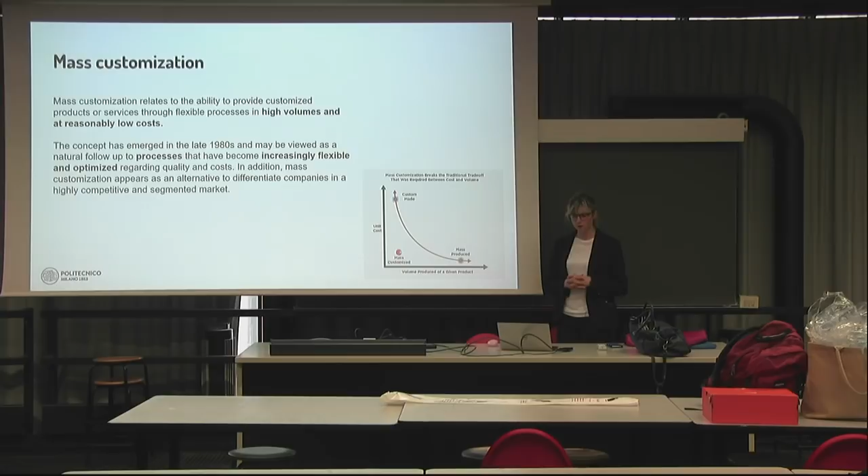So the topic is innovative mass customization for building technologies. And the idea is that mass customization relates to the ability to provide high volumes at a reasonable cost. So mainly the idea is to differ from the mass production that is typical of AEC, so architecture, engineering, and construction, and deal more with customization of different products.

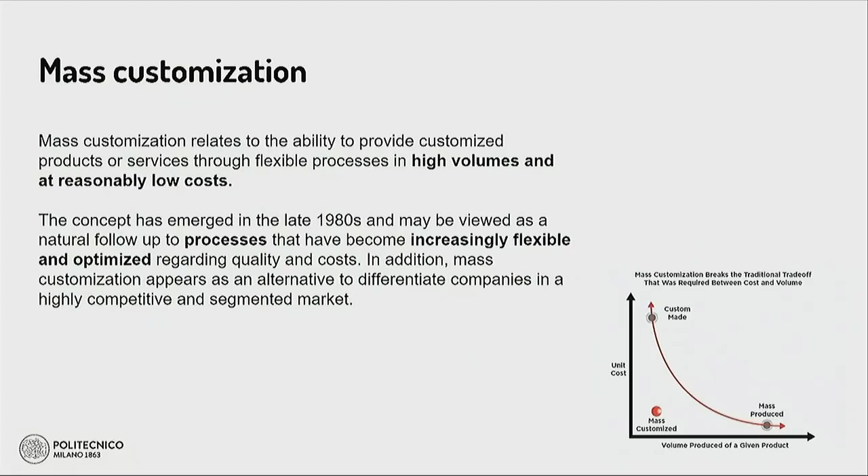This happens in different sectors, mainly more innovative than construction, like, for example, automotive or digital innovation, where things go very fast and are customized for the user because innovation is very near to the user. In construction, this is less known, and it's mainly a customization that goes through some products and some tools, so it's a little bit less focused than in other sectors, but it's starting to be very important because the tools allow it and the innovative types of machines allow it.

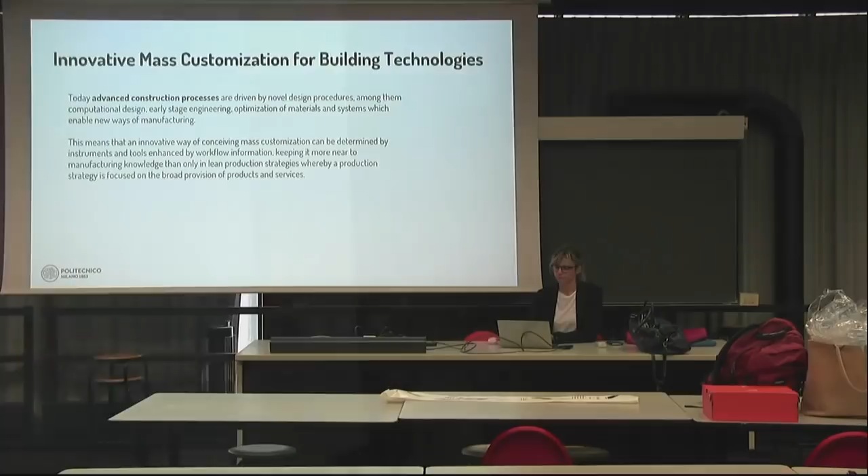So these advanced construction processes that allow mass customization are mainly driven by two enabling factors. The first one is advanced manufacturing technologies. This is a very big boost in how architectural components and building systems can be made, mainly due to advancements in digital and cyber systems, and different types of digital fabrication that allow a direct connection between the architect and the construction machine.

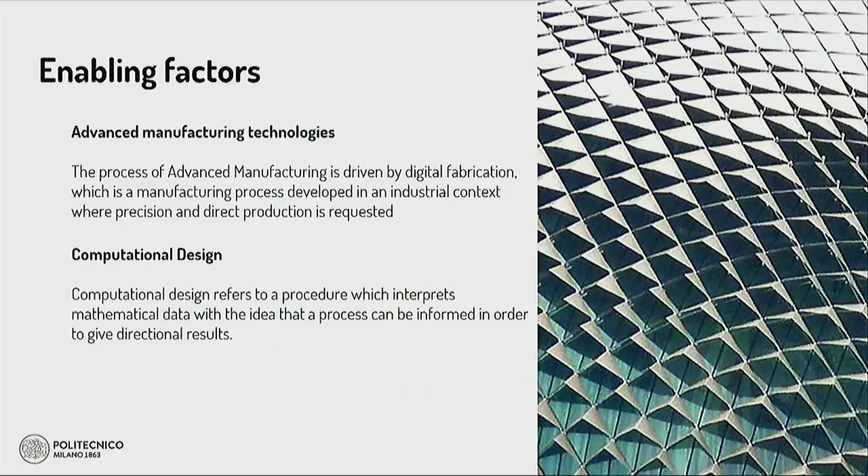Then the second enabling factor, quite important, is computational design. Computational design is a way to make parameters. They make you understand which type of design you're doing. So making numbers that you can work with and understand which type of shape, geometry, or performance you're getting.

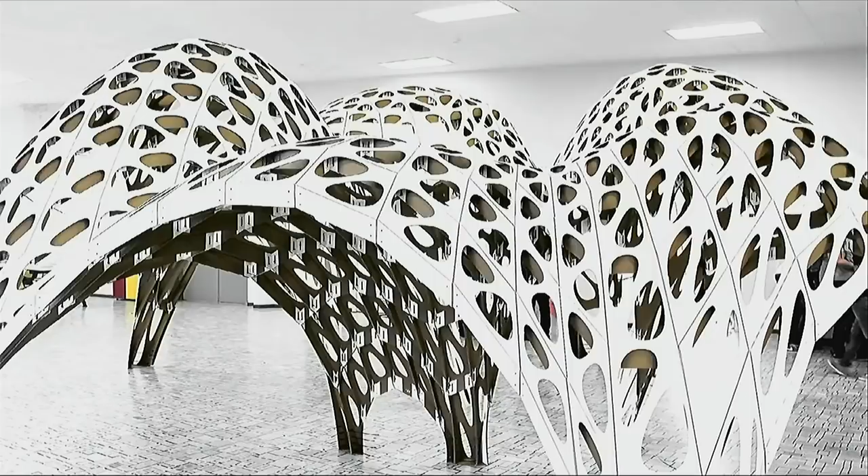So some of the projects I will tell you about are mainly made here. This one was made with the students in 2013. It was part of a workshop. And it's a form-finding pavilion that used computational tools to develop an innovative shape and then to directly digitally fabricate it here at Politecnico. This is the result. It was here nearby in one of our spaces in Politecnico. The idea is to engage the community in what we do here and to work with the students in our spaces.

And this was the form-finding process. So the idea is to customize the design with a specific shape. That is the first one on the top. So the idea to have this hanging curved shape, a form-finding that is mainly dealing with the space because the different entrances are related to the different classrooms. So where you can enter, you have these different spaces. Then we tried to understand the performance, so how it was working, with the meshing process of understanding the different efforts on the surface.

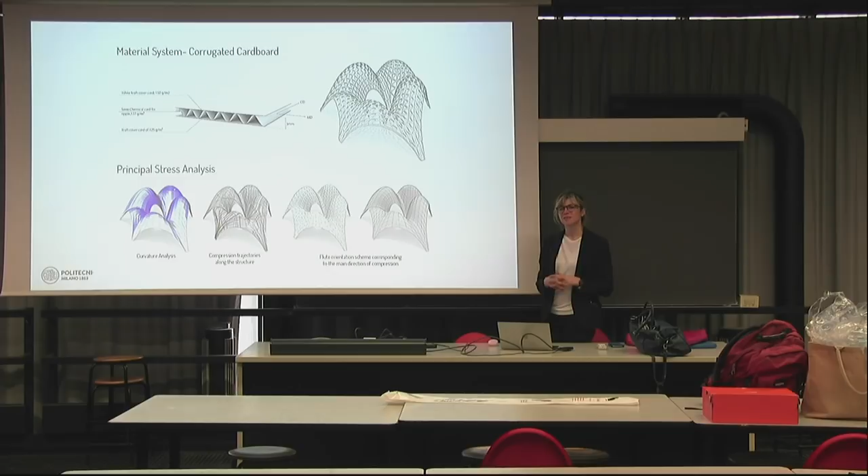Then a material analysis. So I think what's important today in the way we can customize our design is that we can embed properties of the materials directly in the design. With the material analysis, we used cardboard, which is a very traditional material. Mainly it's the one you use for takeaway pizzas. So it's very rigid in one direction and very soft in the other direction because it has a one-directional geometrical load-bearing structure.

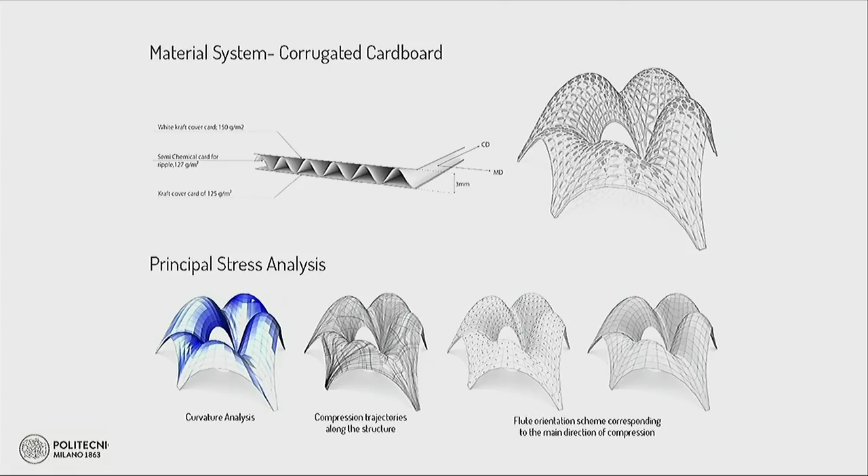So we tried to optimize the principal stress analysis together with the students, understanding where the main efforts are going. And then we started with a tessellation process to make the different components, understanding which are the main directions, and so to make an optimization that allows flat panels. Flat panels are usually much less expensive than curved panels. In construction in general, we have a ratio of cost increase in relation to curvature that is 1, 10, 100. So flat is 1, curved is 10, double curved is 100. So it's much more expensive to have special components than flat components.

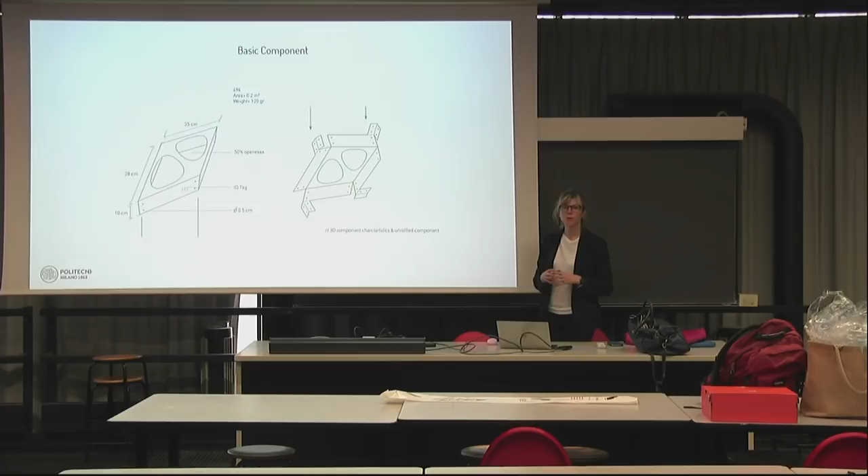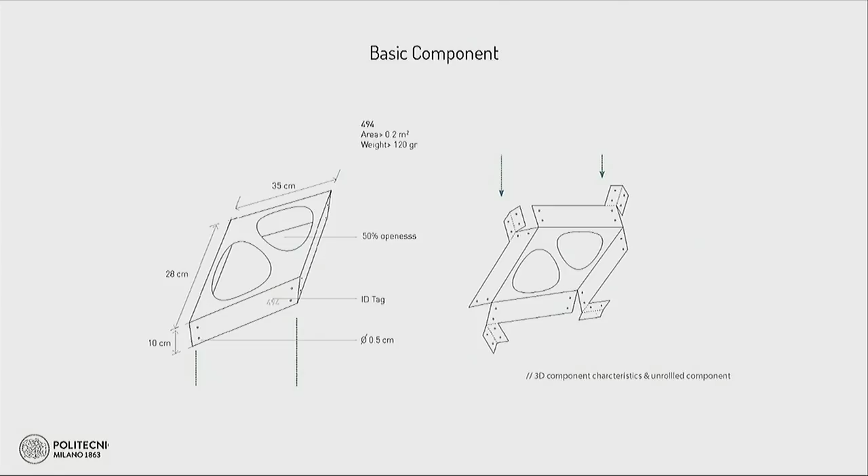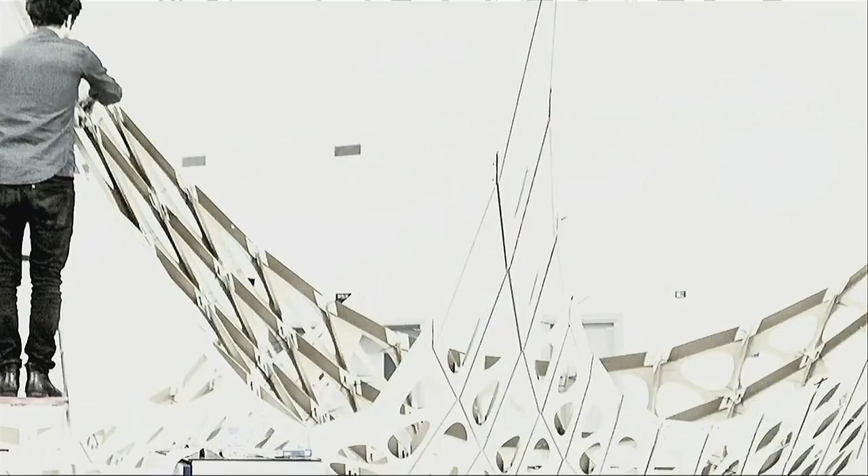This was the final effect, trying to understand how it could work. And then we assembled it in components, like in mega components, because of course the structure is resistant just in its final shape, so it's not resistant in portions. So we made this different exercise to make big portions of the structure and then to assemble them together. And this was the result.

It was also quite important to understand how to fix it to the ground, because of course it's not a ground that you can usually use to fix structures, and it's very important for the resistance of the structure because it's a form finding process. So this was the use, as we were saying before, of computational tools and digital fabrication to engage directly in the design with the constraints of materials.

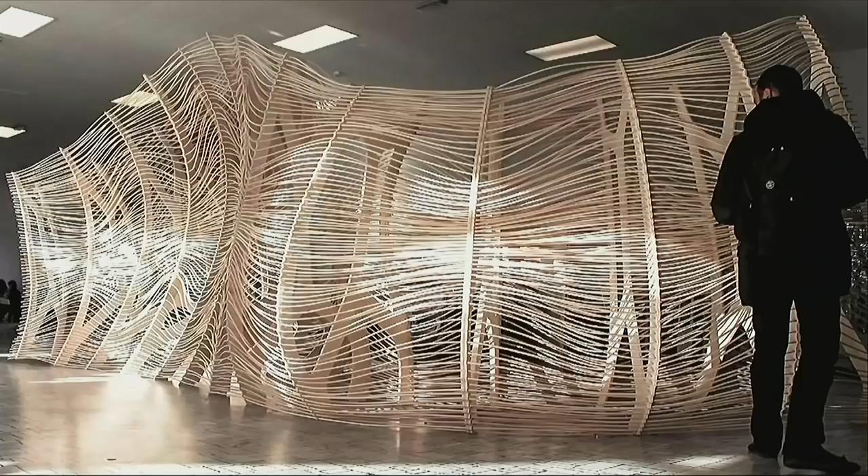This is another workshop, always with the students. The idea was to work with a much more traditional material. It's rattan and wood. And the idea was to make a structure that could be resistant with the weaving technique. The weaving technique is very old. It's typical of different types of objects that are used every day in many countries. And the weaving technique allows to strengthen the resistance of the material due to the specific pattern.

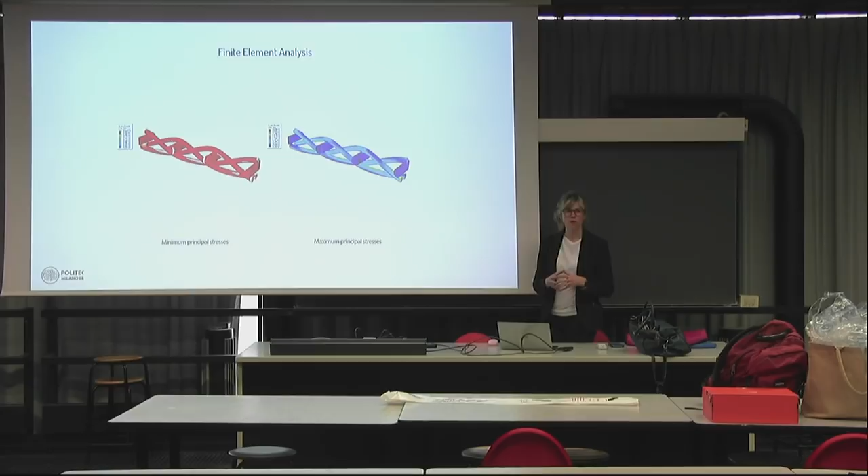So we made different types of studies on the patterns to understand which one could be the most resistant: single tensor, two crossing tensors, three crossing tensors, making different simulations also with quite complex software to understand how the different crossings could work. We made some FEM analysis also for the stresses, because it's a very particular structure. The idea of our design was that this mega component could be a shading or an internal component, for example, and should be resistant by shape, as in the first example.

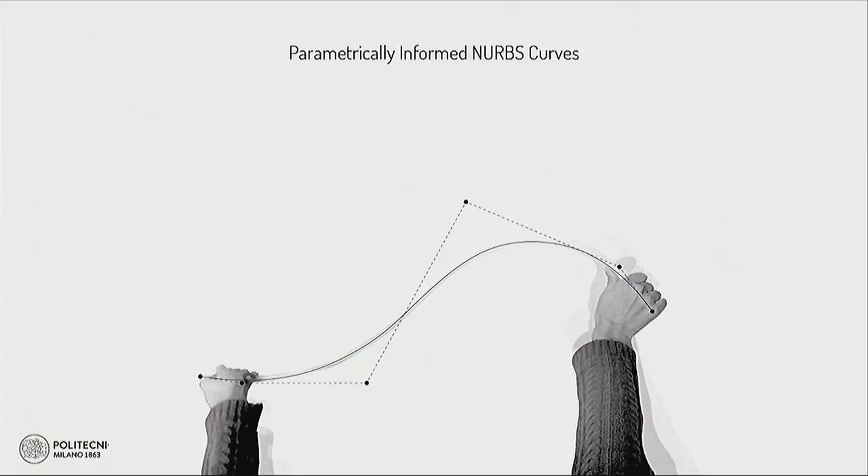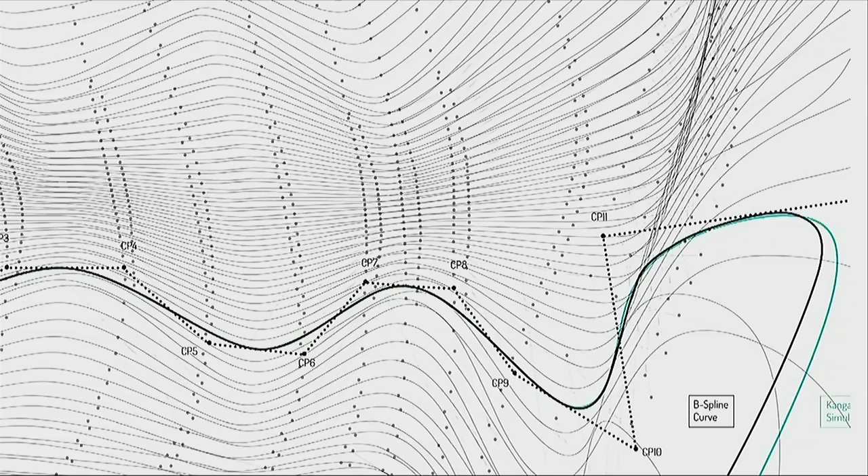With this information in mind, so a more informed design, we made these different types of simulations with Kangaroo. It's a simulation software for Grasshopper that is quite easy, because you can put different types of loads in your structure. And we tried to understand which was the maximum curvature we could have. So we made a sort of double effort: a first practical one, to understand what could happen bending the structure, and a second one that was more digital, what was the possibility to bend this structure. And this was the result.

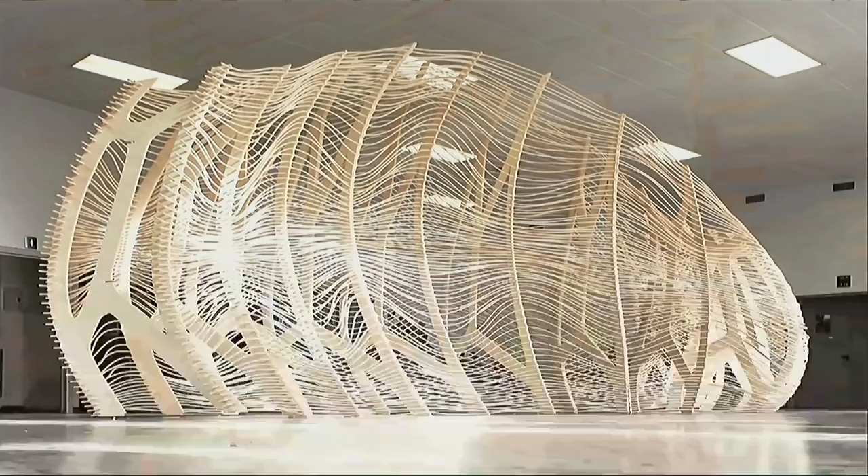We made some supports in the meantime, because here too, like the first case, the structure is not self-standing before the final configuration. And this was the result, here in the Polytechnic, because it was also done with the students. We had some issues with the rattan, because rattan is a very resistant material. When we bought this rattan for our project, it was not bending enough, so we had to use more water to try to bend it. But this means that the holes, which were really perfect, with tolerances near 1 millimeter, were not exactly what we expected. So we had to work with the tolerances between the rattan and the holes of the structure to make it fit perfectly.

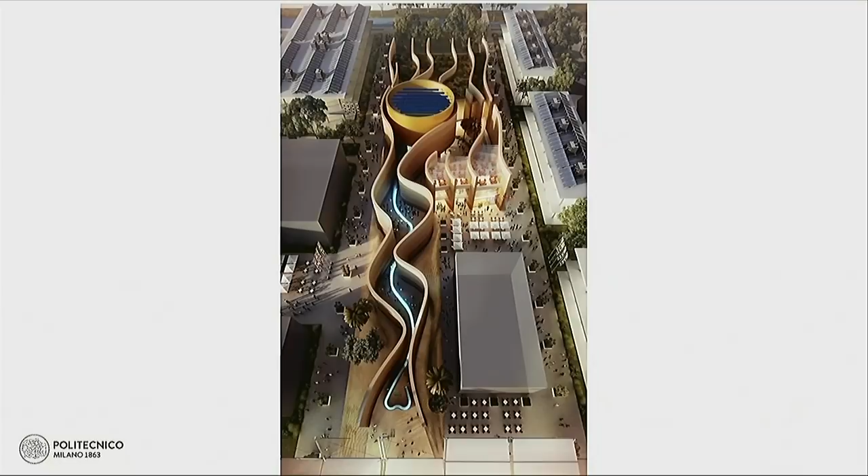This is another case of, let's say, mass customization, that is the topic of today's lecture. This is a pavilion of UAE in Expo 2015. And in this project, we were engaged with the idea of reducing the number of panels for the UAE pavilion and understanding how many types of ripples we can work with

the pavilion. This is a project from Foster and Partners, and there was a main contractor, and also producers or manufacturers of GRC that could build this. And we were in the middle with the construction company that is called Rimond to work and understand which was the best configuration of panels and to find a solution to reduce the number of panels and find a solution that could be cost-effective and in time.

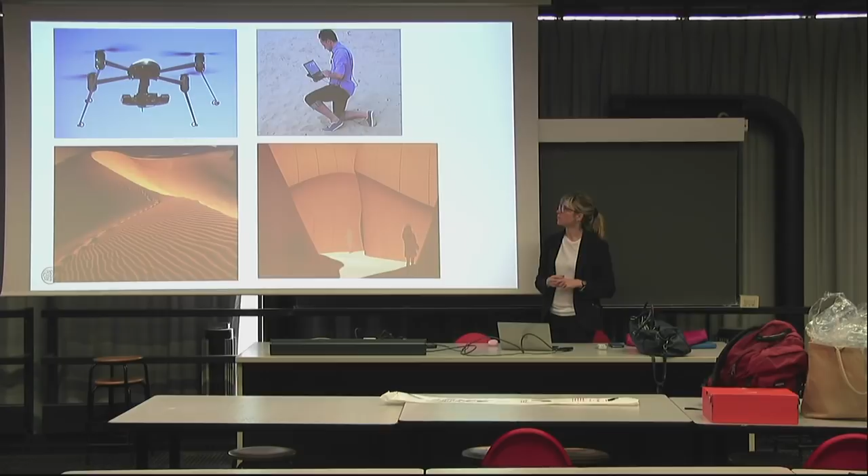This is the design process from Foster's, so the idea to have drones and understand how sand dunes move, because they are moving a lot. We always think of a desert as a fixed natural system, while it's moving very much during day and night. And so they tried to map what are the ripples that happen in the desert due to the wind, and so this was the idea from the designers.

Then they tried to make small panels to understand which could be a panelization that could work. This is for the envelope mainly. And the idea was to have 4 tiling periodic systems, panels that could be continuous. So even if you rotate the different configurations from A to C to D, you would have the same junction. So it could seem to be very different even if it was the same.

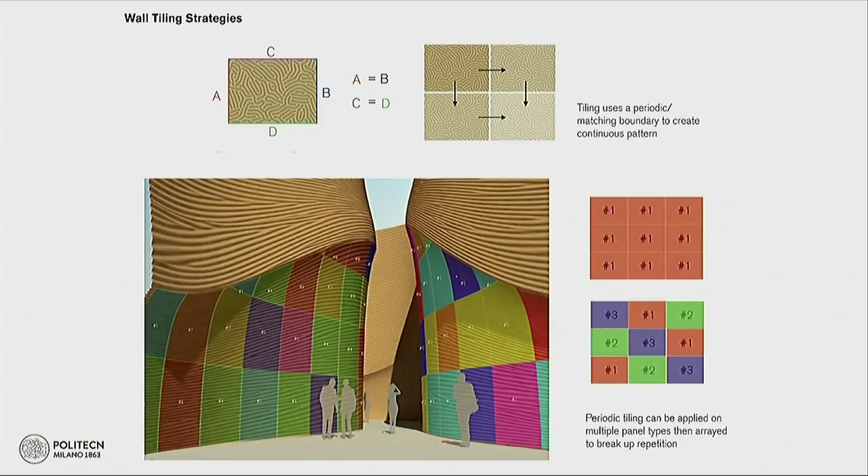So there were different trials in Foster and Partners studios, and this was mainly our first work in the project: reducing the number of panels and then to understand maybe a way that could be more complicated, to make big panels, but also more cost-effective and easy to transport.

Expo has a very specific issue that is time, because they have to open on the 1st of May of this year, so you cannot afford to have delays. So this was one of the main issues: let's try to make a solution that maybe could be a little bit more difficult in the design phase and maybe manufacturing, but that can assure us to be very fast on site. So these were the different types of panels.

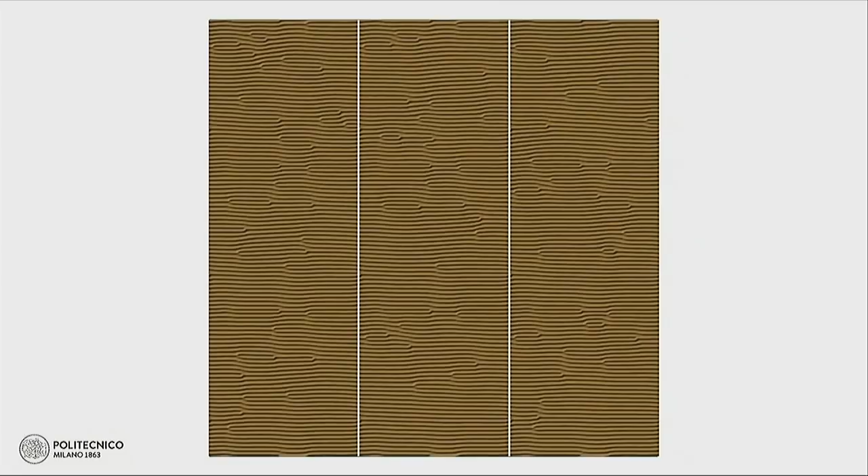At the end, the height was more or less 12 meters, because the idea is that you can stay in the transportation dimension. Usually 12 meters is the maximum transportation dimension; after that you have to take care of more issues when you transport materials. And then we divided the panels to be sure that it could have these ripples working together.

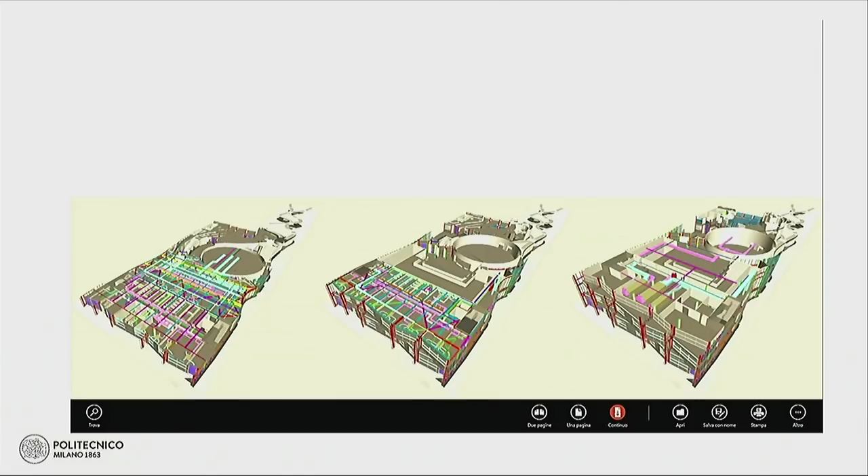All the project, of course, was done in BIM, not only to understand the clashes, let's say, but also to understand how the different systems work together: HVAC, structure, cladding, timing. It was a very useful system for the management of the project and not only the design.

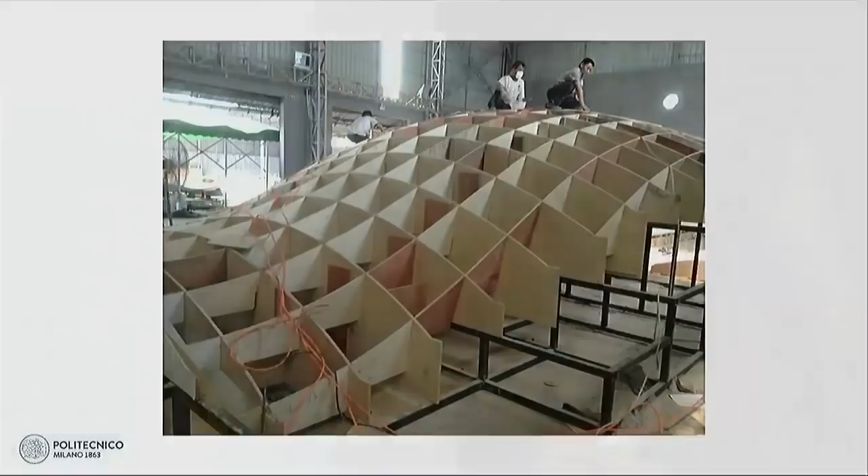But then at the end, the result was quite successful, because we could make different types of panels. We had molds, so that means that it was quite easy to make these different types of ripples, and the big dimension allowed us to be very fast.

I think additive manufacturing is very typical of mass customization, so the idea that you can customize your own design. It's a line of research that is working a lot also in other sectors: automotive, motors, mainly metal additive manufacturing. And here we are making different studies, one of them with junctions, to understand how different types of systems and materials can work together.

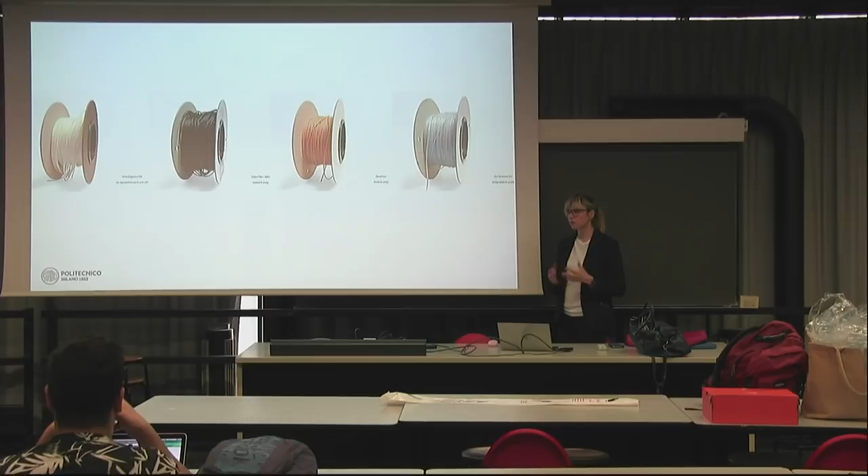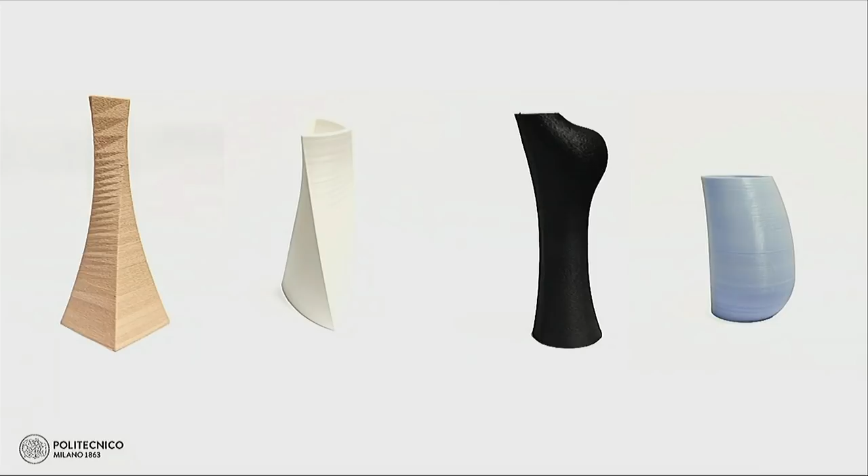I think there's a lot of research, and it's quite important for architects to work with different types of materials. So which are the properties I can really design? Which are the types of performances I can work with and customize for my own design, with an average cost that is typical of construction? This was part of an exhibition we made in 2015, called Digital Takes Command. And here we worked with junctions.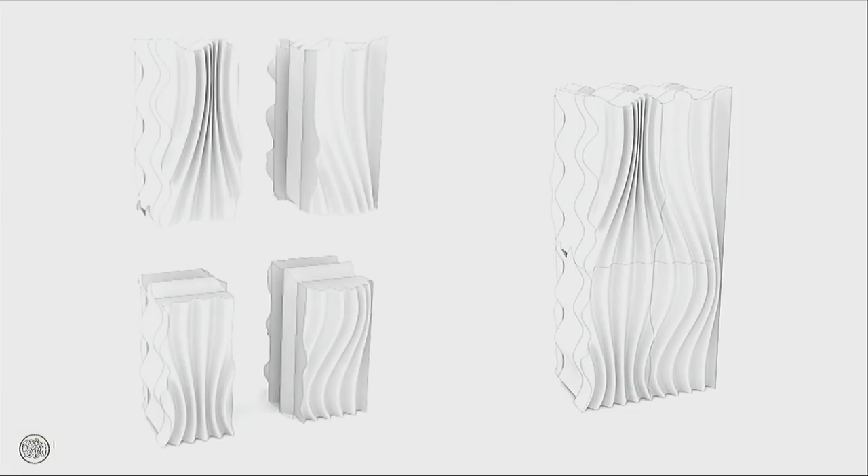So what are the junctions in construction? They are very important because it's not only about joining two systems, but also what happens with the different types of junction. Are they open? Are they closed? Do I have a frame? This is very important to design from the very beginning because it will completely affect your design. It's something we sometimes forget with additive manufacturing, but it's one of the most important, because having good joints means your construction system will face different issues and will probably also be different from an aesthetic point of view.

This is always in the direction of customization. I think you will see it in a couple of weeks here in Politecnico, in the south area. It's a completely 3D printed load-responsive cellular envelope made with additive manufacturing, where all the components have been designed for the specific loads of the component.

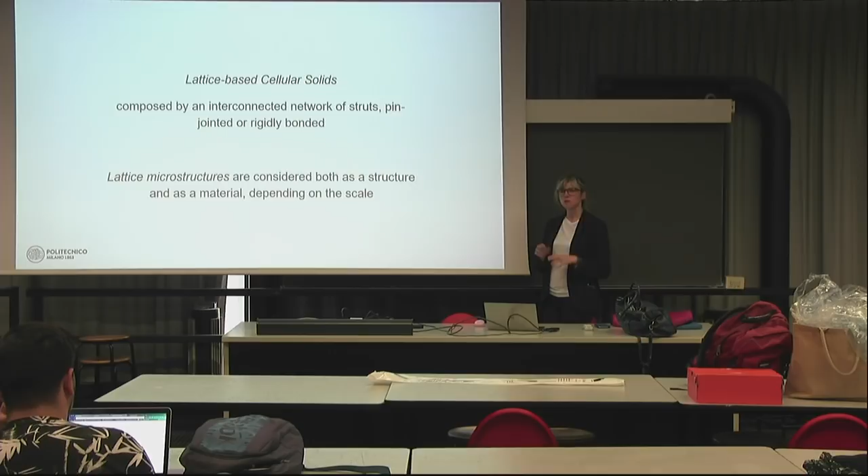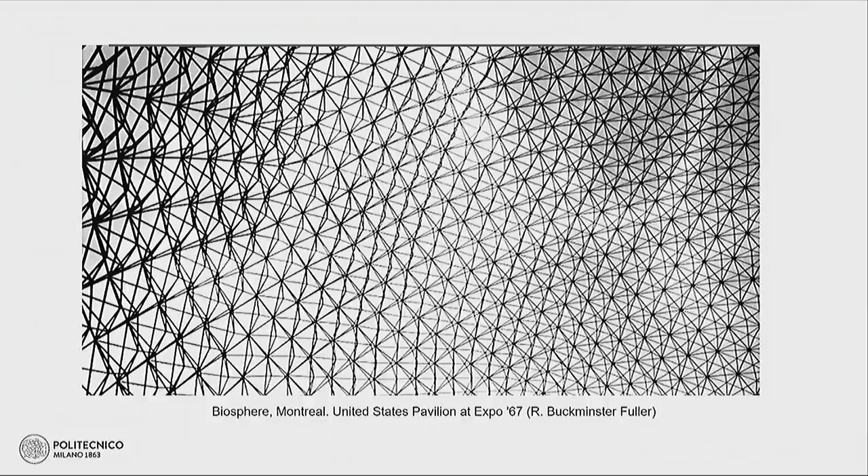It mainly comes from a lattice-based cellular solid, an interconnected net of struts, pin-jointed. Some examples could be Buckminster Fuller. Now it's very typical of additive manufacturing because it allows you to print in space. That means you don't have to make molds like the one we saw before. It's a completely different technique that gives you much more freedom.

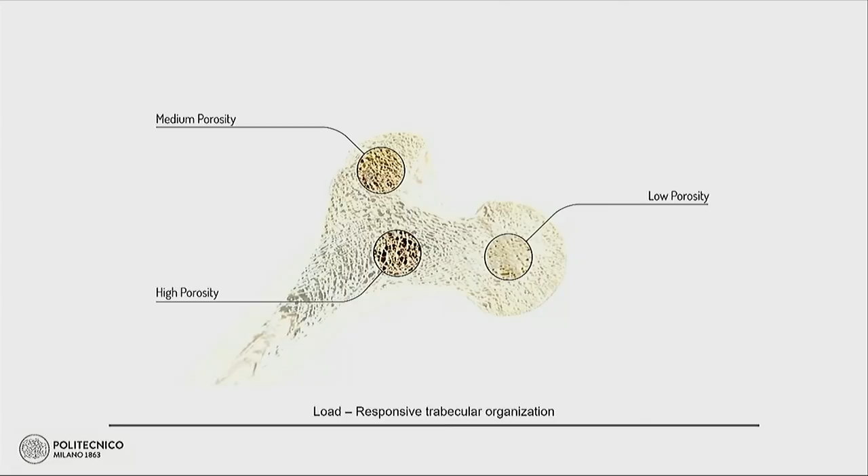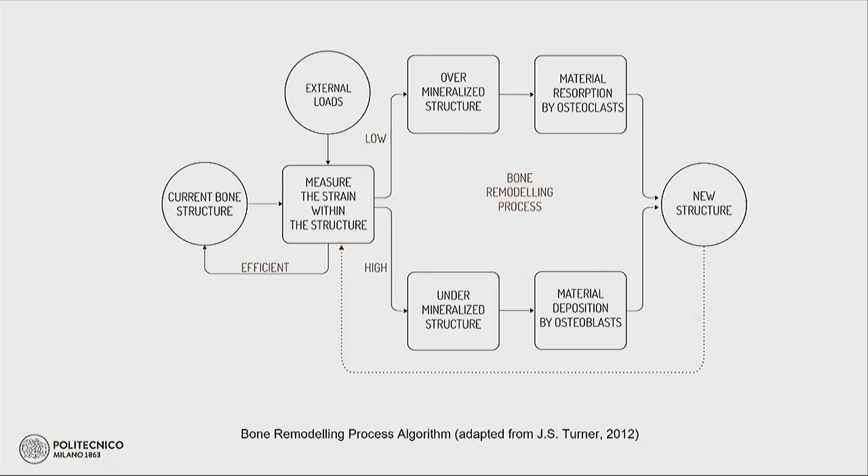The idea of this project was to work with different densities in the design in relation to where the bigger loads are. Where we have higher loads, we have different types of porosity. Where we have lower loads, we have higher porosity. This was the process, taken from nature, let's say, but in a more innovative way: understanding the current bone structure with its strains, and then trying to remodel the structure to have the right mixture of cladding and load-responsive cellular solid.

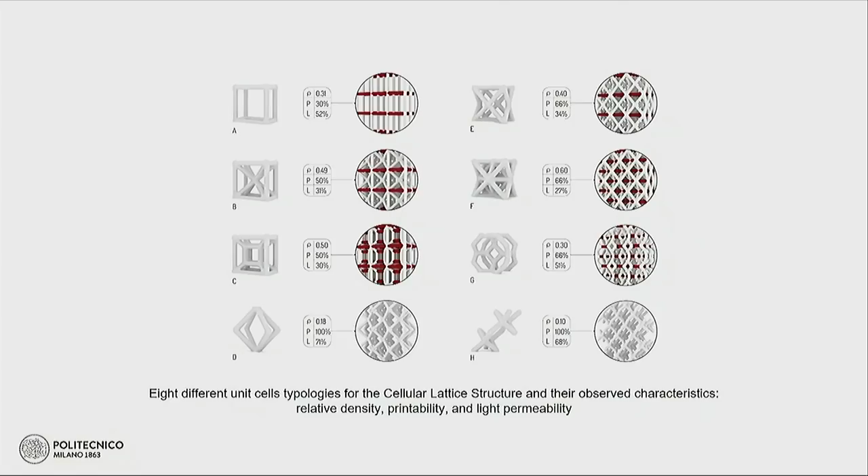We made different experiments to understand how much we could work with permeability, density, and printability. Here too, the main issue and opportunity was to embed the different issues in the design from the very beginning. How much density can I give to the structure? What loads can it take? What type of material, and what characteristics does this material have? And how can I print it, trying to improve the printability as much as possible?

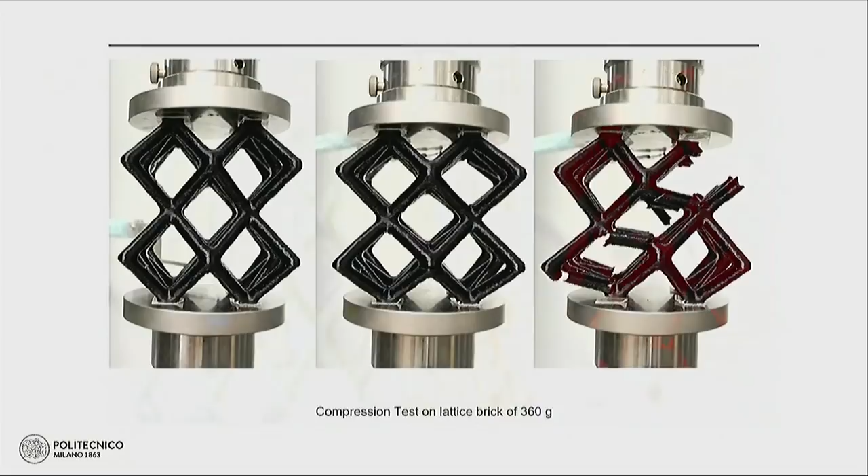Then we made some experimental components with different densities, another exercise to understand how it could work in permeability, lightweight, and different types of structure. This is part of the structure with the material distribution. We made tests to understand this type of structure because it's quite experimental, but I think mass customization in construction is experimental because it pushes the border between a very traditional way of designing with standard construction systems and customizing our own construction system.

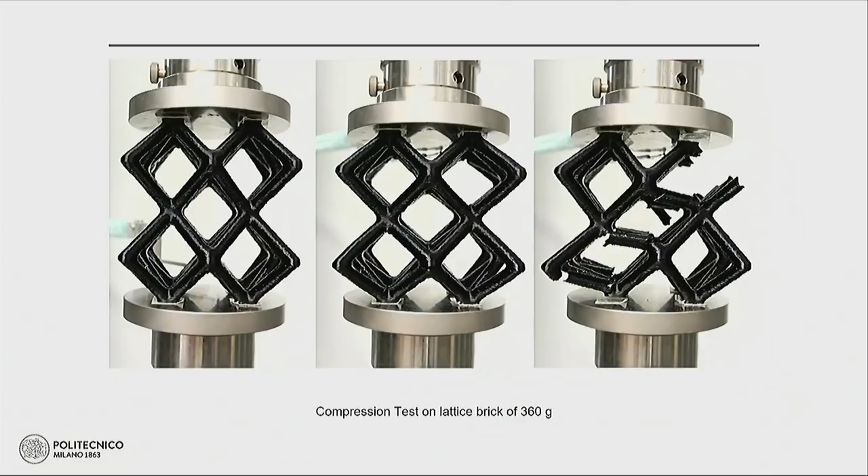We made different types of compression tests on this lattice structure. A small brick of 360 grams can take a load of 300 kilos, and 300 grams took 1 ton. So it was quite a good result for a structure made with polymers, mainly thermoplastic polymers, which usually don't have such a big resistance, but they can work very well also because of the design.

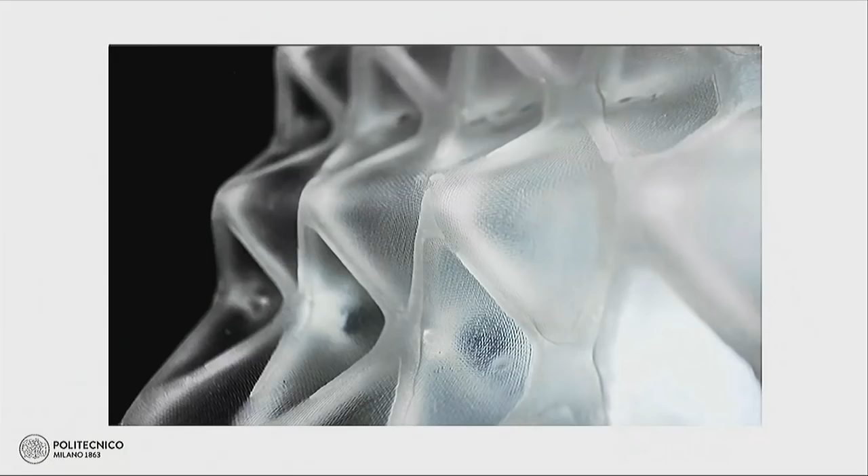We made already some samples in different types of exposition, let's say, and this is where you will see it in a while. I think the base is there, and you will see the structure in a couple of weeks. So this too was made with a research project of PhD, but also with some students, with intern, thesis. So it was quite a good exercise for students to understand which are the opportunities to push in the design, which are the competencies you can raise with this type of technologies.

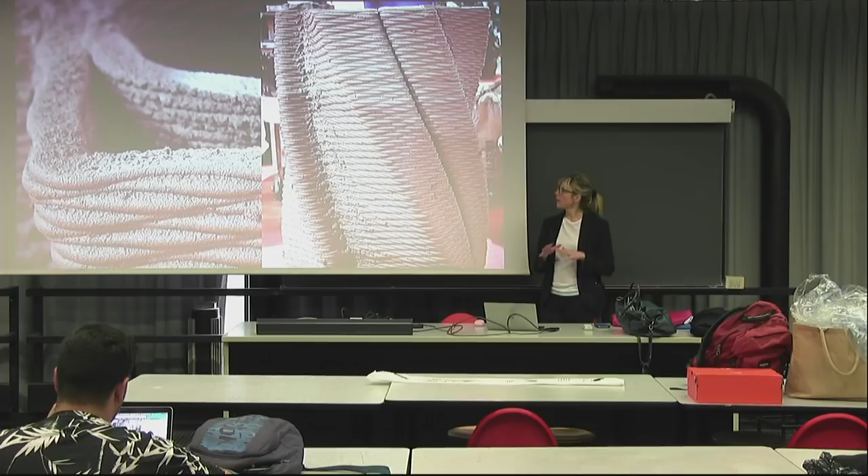Then in construction, of course, there's a lot of accent on very traditional materials like concrete, for example. And in concrete, we have worked with columns to face the possibility to have a concrete that could work also structurally and that can have like a torsion in this case, so to allow a shape that could be very difficult in precast technologies. I think it's very important to think that additive manufacturing is not substituting the construction sector in some material, but it's more a hybrid technology. So where some things could be very difficult or expensive in the manufacturing way we are making now, we can add with these new types of technologies.

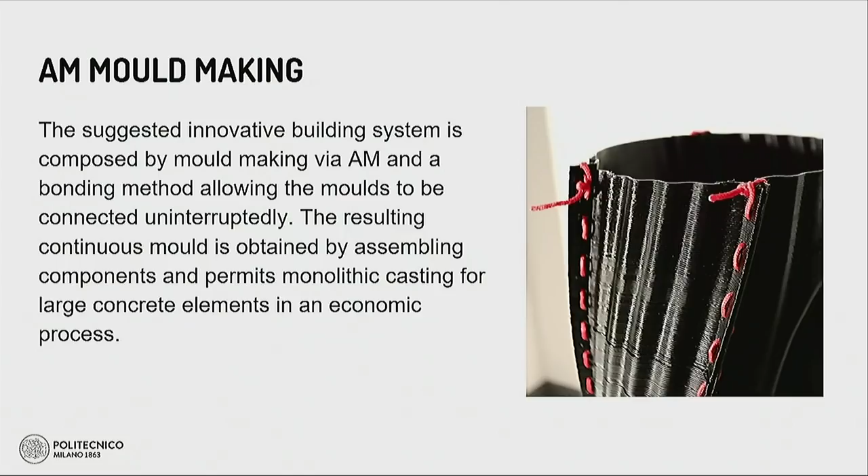And another vice versa technique that is quite useful is molding. So it's different types of molding with 3D printers. The idea that you can make different types of casting, so to allow particular shapes, to allow to have holes. I have this example here. To have twisted shapes, to have different types of aggregates. I think this is a very promising sector too. It's important to try to push the boundaries, which can be the experimental possibility also to try with traditional materials, traditional techniques like molding, but trying to push it with this computational design and with the new possibilities of the machine.

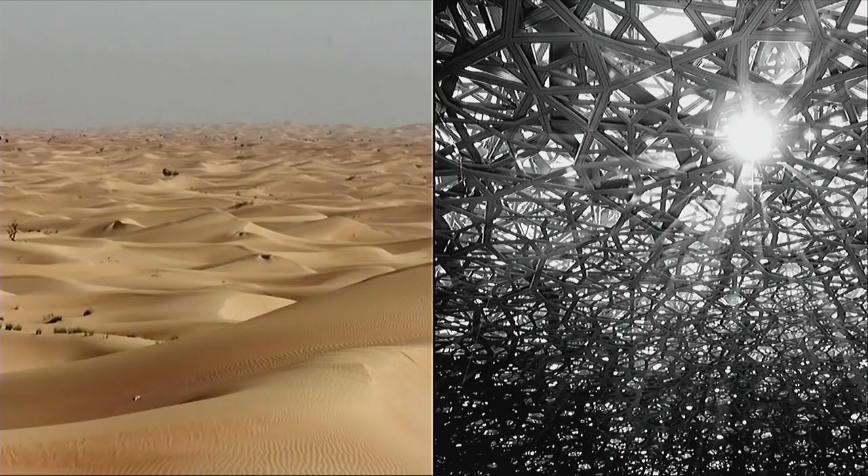Then I have this example that is also quite nice on this mass customization on construction system. It's printing with sand and wind. It's a project we are following with the overlay division of Expo 2020. And the concept was, let's make a shading. In this case, it's an external shading, and it has to remind the desert, but also to remind a very transparent structure. This is the Jean Nouvel Louvre in Abu Dhabi. So it's a completely permeable structure that lets light inside to have a very particular experience of the museum.

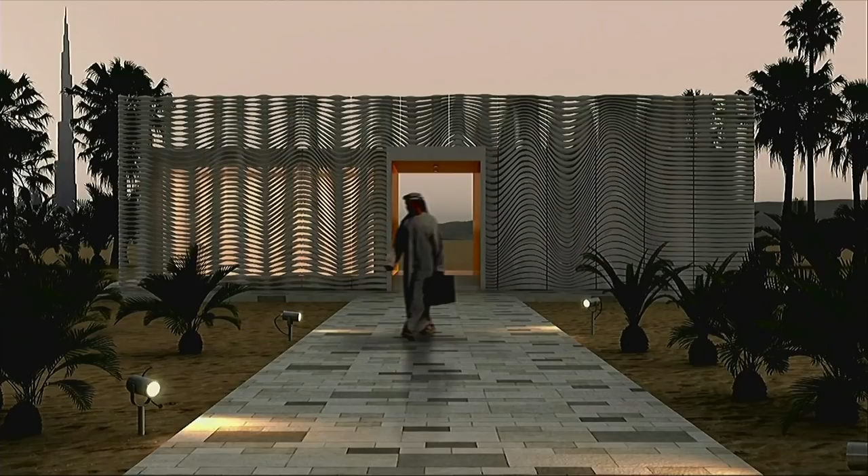So this is the building. It's a study on this concertina pavilion. Concertina pavilions are the pavilions that are not part of the country pavilions. It's mainly services pavilions, meeting rooms, prayer rooms. And the idea was, let's try to have a cladding, an external shading that can remind the idea of the desert that we can see in all the different concertina pavilions, because there are a lot, but it can also remind something when you see all of them. So it's customized, but reminding with the same design. So it's a real sort of mass customization. It's more open where we have lighting on the back, so the idea is that you can see inside, and it's more closed where you don't need to have transparency.

We made different studies trying to understand how this shape could work in relation to the idea of the design, so of the type of sand we were working with. We made different types of small models. I think this is also what we are trying to do here. So it's first the design phase, then embedding the materials, and then trying physically to understand which will be the result. We made different trials with different types of materials.

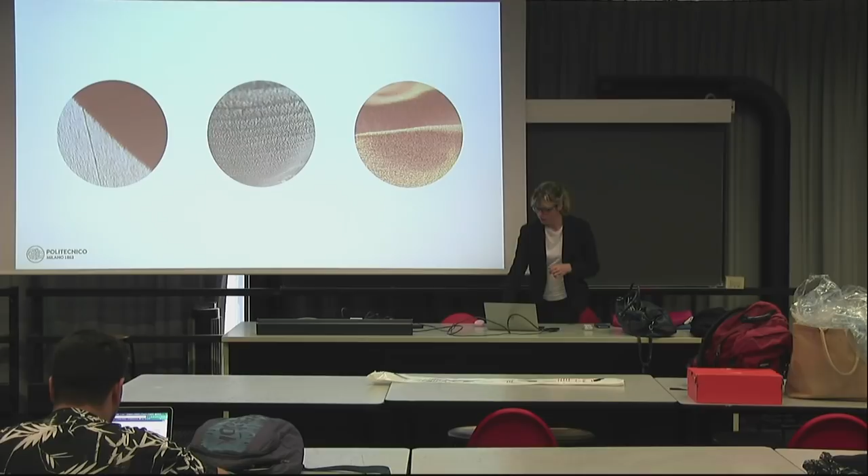One is PLA plus paper. It's a sort of HT PLA, so it's high temperature PLA, because this type of material, it's a biopolymer, but that has a melting temperature around 90 degrees. So for UAE climate, it was a little bit tricky, because even here we are in a warm climate, but UAE is even worse. Then we tried with cement and Dubai sand to work maybe on a more durable solution. And then we worked with resin and Dubai sand. That was more or less the final idea.

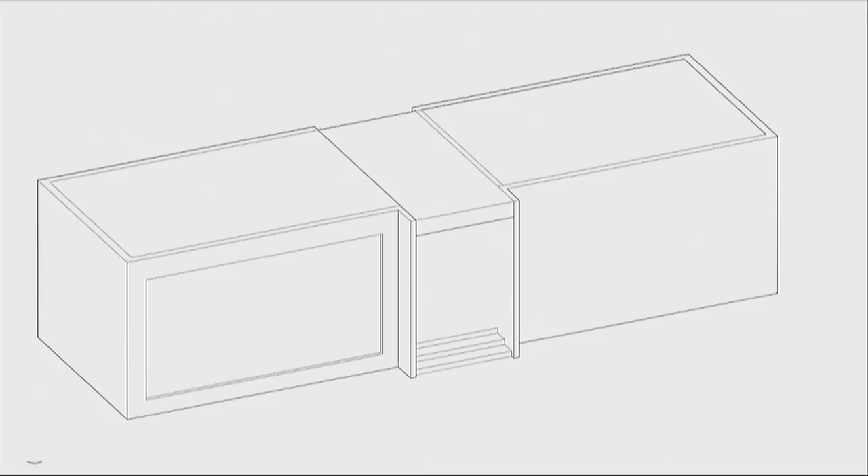This is the structure, so it's a secondary structure with different types of components. The challenge and the opportunity of additive manufacturing is that you can decide how you want to cut the different types of components. We had a modularity that is done mainly by the machine, but then on the horizontal line we could do whatever we wished for, and this was quite useful also to make the right component. These are some other examples of the whole assembly of the facade.

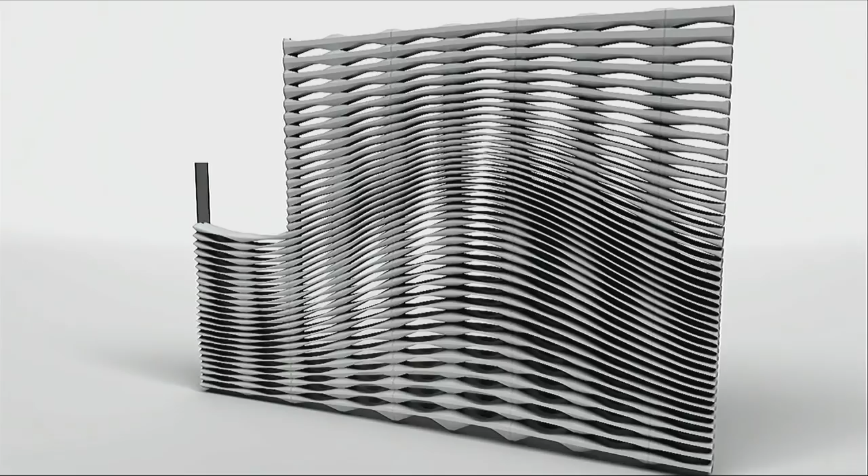And this reminds the design we were doing at the beginning. So trying to work with this wind and sand to make the different components, and then to try to go to the prototyping. We worked then with an abacus of facade systems to understand how it could work, and an optimization of the different components.

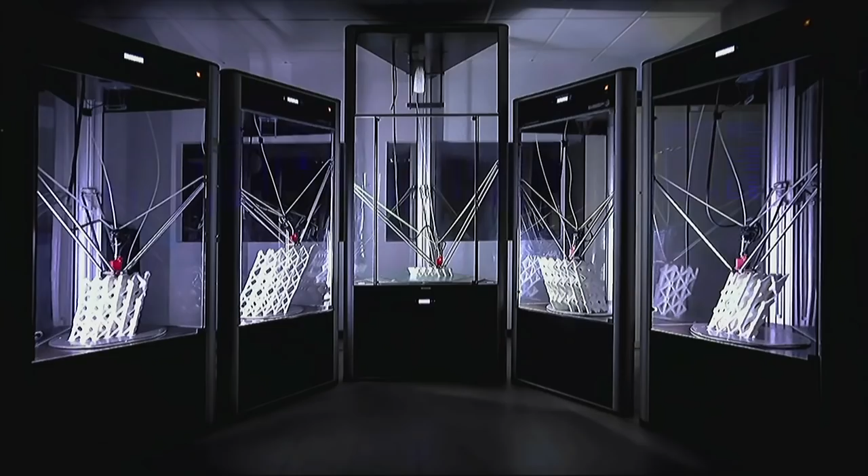This is one of the printers we have used in this prototyping. We have it here in Politecnico, so I don't know if some of you will go for a full-scale prototype in the project, maybe it could be an idea. It's a very big one. It's called 3 meter, but the printing area is 1 meter by 1 meter by 1.20, more or less.

And this allows it to be quite fast, because one of the issues of additive manufacturing is that it's very slow, so it takes a lot of time to make the component. I think we are quite ready in additive manufacturing to make components that could go on site.

There's a sort of problem with legislation, because here too, when we started to understand, we made a full mock-up of the prototype, and then we said, okay, but if someone is installing this, who is taking the responsibility for an object that is 3D printed, not an industrialized, manufactured component? And I think this is a very big issue that will come in the next years, which is exactly the context that can allow these innovative technologies to go through in the market. So who can guarantee, what are the types of tests?

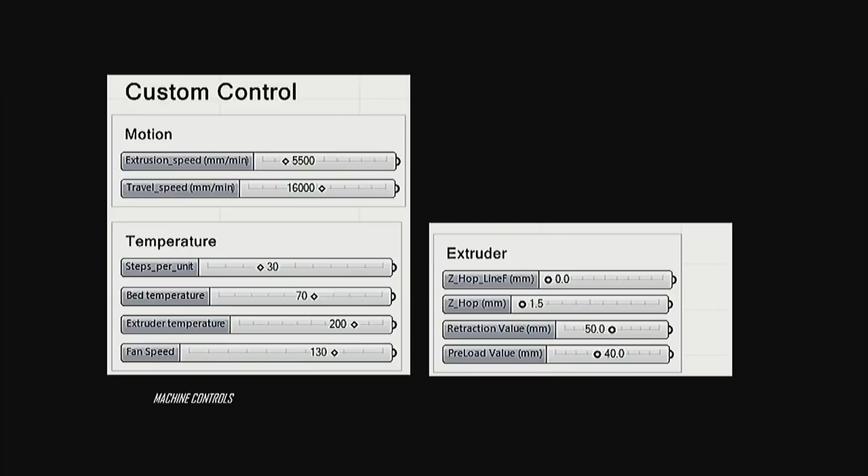These were the different parameters we were working with, so the different extrusion, the time, the temperature, and this printer, for example, is working with pellets, so it's not working with filament. Usually when you work in different small sectors like design, you work with filament. Well, in this specific sector for construction it's a little bit different, because we work with pellets, these small balls of plastic. And this is very useful because it allows you to make the mixture you like.

It's a little bit as we saw at the beginning. So you can customize the material you're working with and you're designing. And then it allows you to be faster. That is, for construction, one of the biggest issues. And this is the extruder. As you can see, it's much bigger. And there's a lot of research on manufacturing techniques.

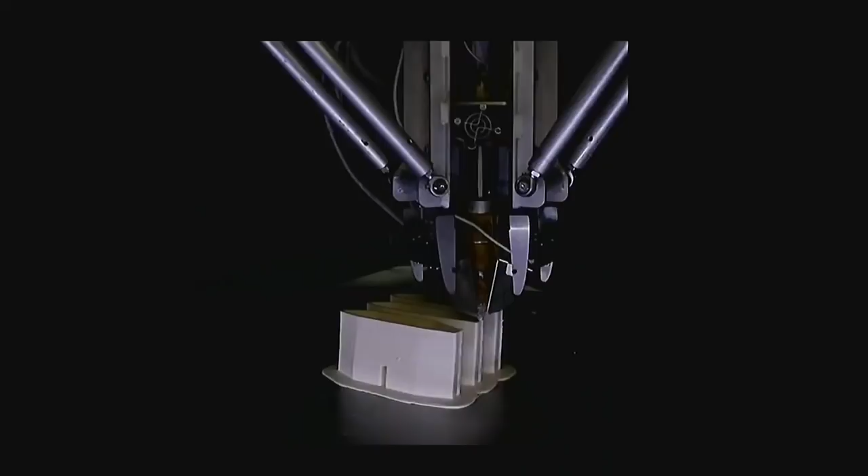So which type of manufacturing could work for construction, also on CNC machines, on hybrid systems of manufacturing, on robotics, of course. It is more complicated for construction, but can be very useful because you have more axes. In these cases, you have only 3. Sometimes you can have 4 if the plane is moving, but mainly it's 3 axes, while when you use robotics, you can have more axes.

Even if construction, as I said at the beginning, is a little tricky sector, because innovation is less needed than in other sectors. In other sectors, you really have to push, because you have to change the product, you have to update in relation to competitors. Construction is a very stable sector. It's capital goods, so it's something that stays for a very long time. So innovation happens more in an experimental way in some parts of it. So it could be a construction system.

There's now a lot of research on augmented workers, so how the workers can better deal with the site. So instead of being traditionally assembled, this component could be seen with iPads or augmented reality. So you can really work in an environment where you know what you're doing.

And then, to close, it's mainly this idea of the future of mass customization. It's an evolution that would materialize the idea of an almost complete customization, where you can really know exactly how your building is working. A little bit like sailing or other types of sectors where you know exactly how your boat is made. I think construction is going in this direction.